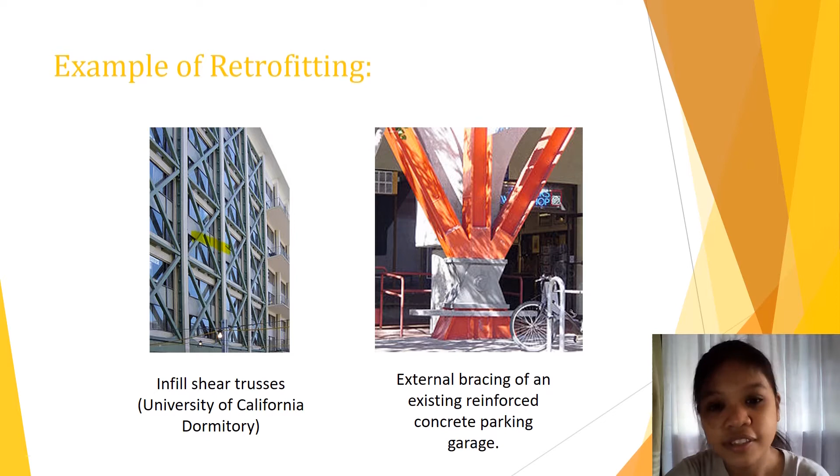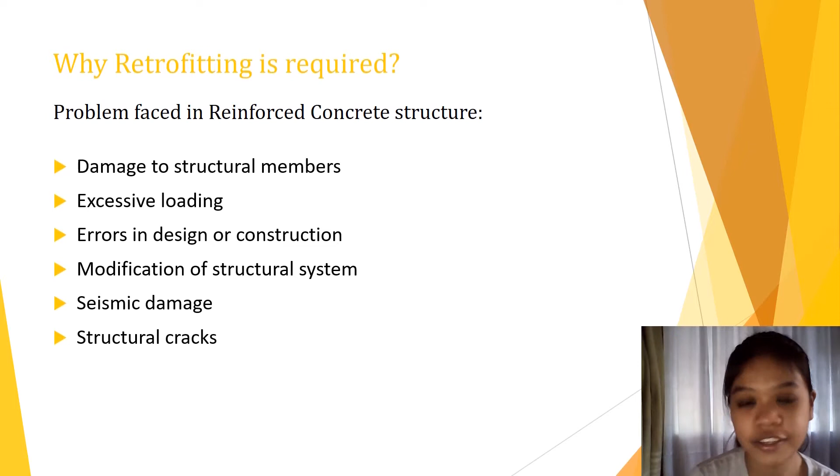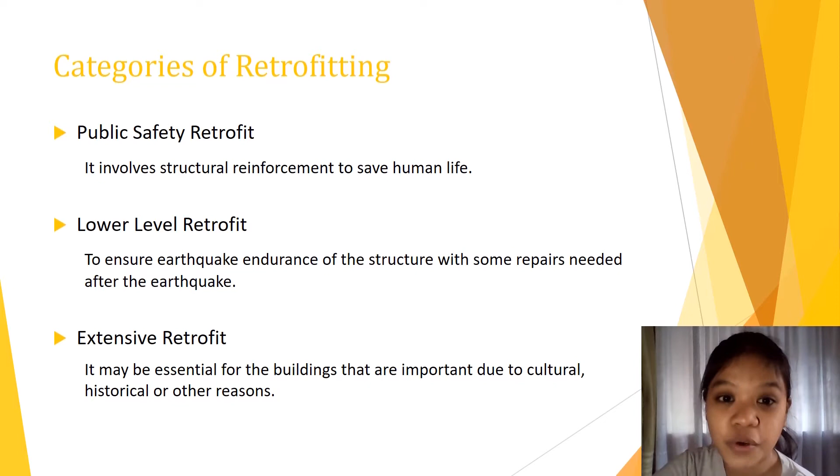Mostly, retrofit is performed on buildings that are extremely high with an unsafe earthquake vibration frequency. Presenting to you the retrofitting techniques that are used for the structures.

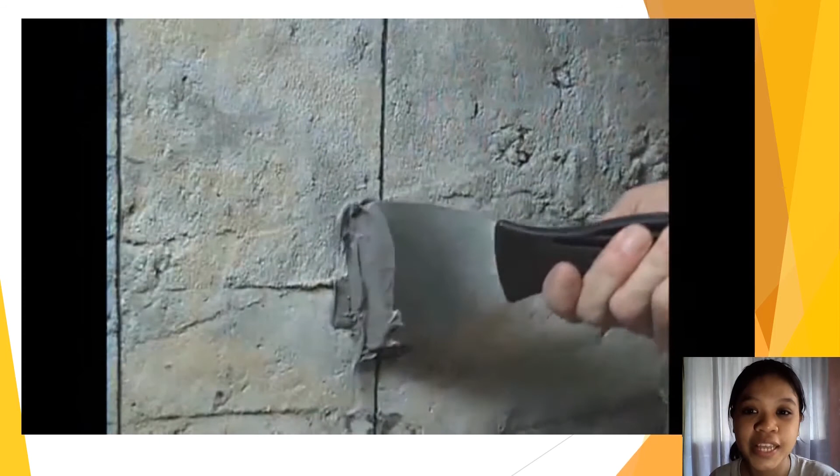So, here's the example of the grouting and micro-concreting. And to be able to understand the method more clearly, I will show you another video on this method. So, I'll be playing this video. The following is the process showing how to perform crack repairs utilizing structural injection techniques.

The first thing is to clean the crack using a wire brush. Then thoroughly clean the concrete surface around the cracks so that the cracks are not left with any debris. Blow out the crack with compressed air, and then seal the crack on the outside. This is referred to as capping the crack. Use two-component general purpose repair epoxy and apply it to the part where the crack is.

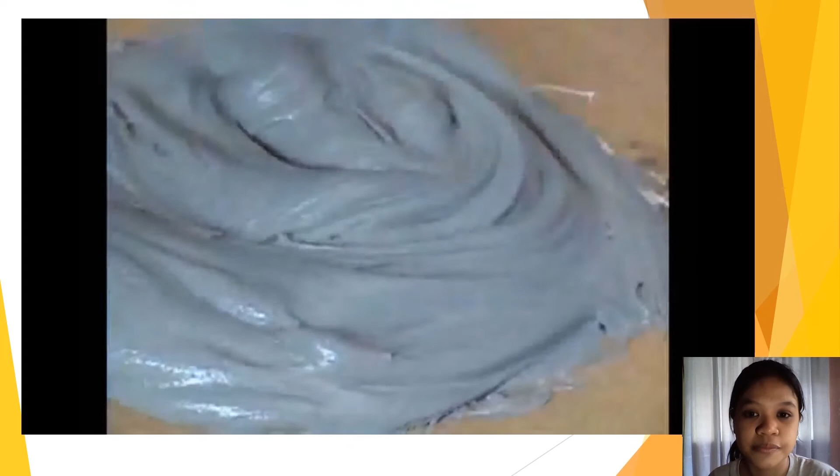And then, the epoxy should be applied 1 to 2 inches wide along the length of the crack.

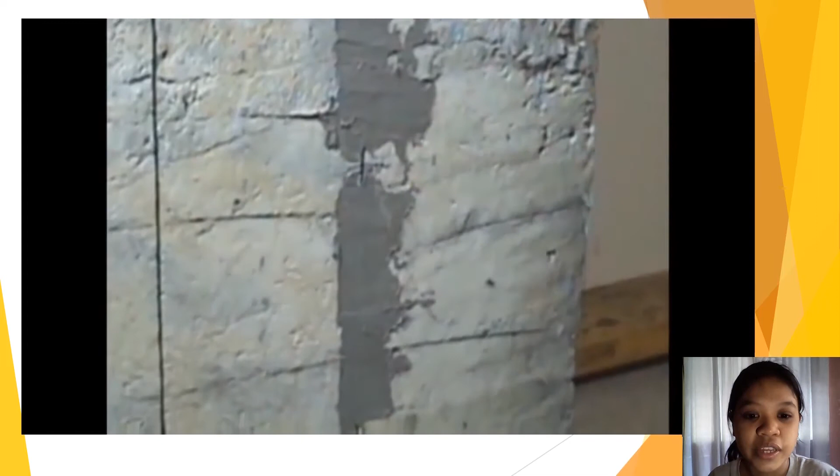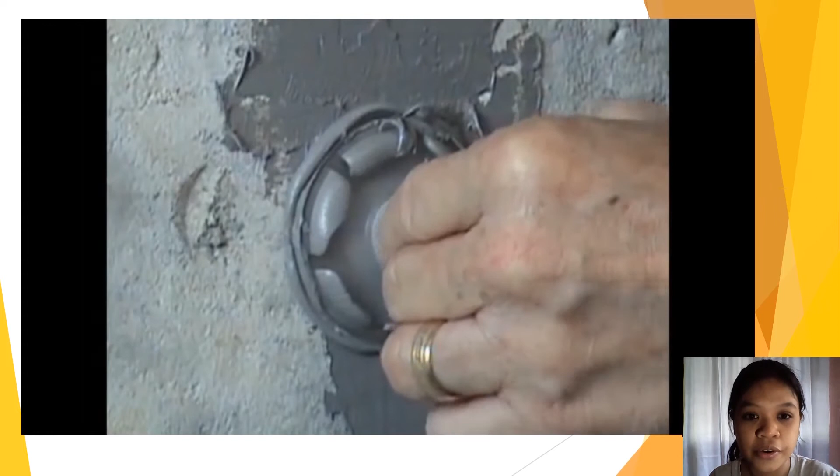Then, next is to fix the grouting nipples in the crack at a spacing of 6 to 8 inches.

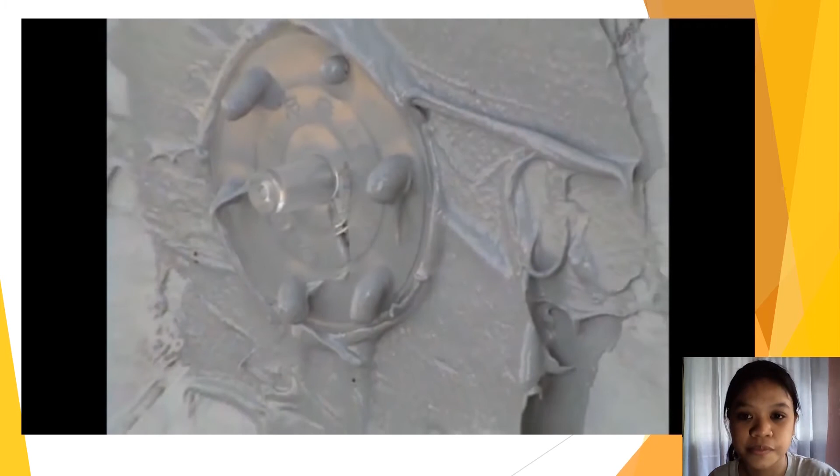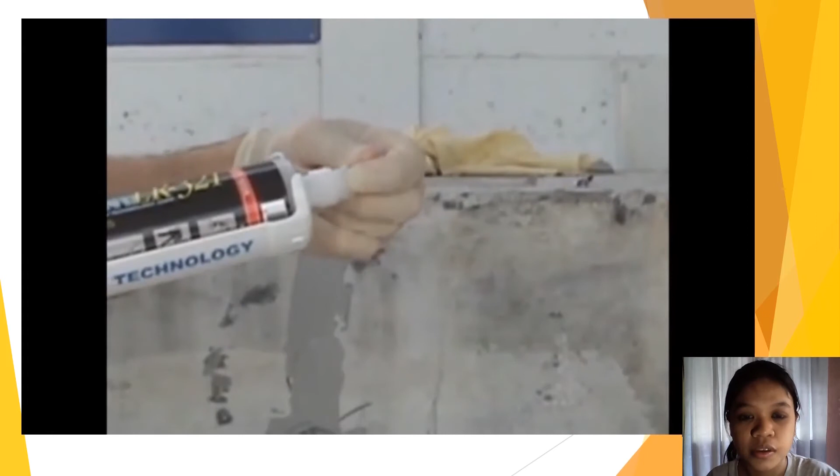And then, make sure that the epoxy is completely cured before starting the injection process. Inject water through the nipple so that the dust inside the crack is washed off and the concrete is saturated with water. After that, inject the grout till it comes out from the next nipple and then move to the next nipple. That is the first one.

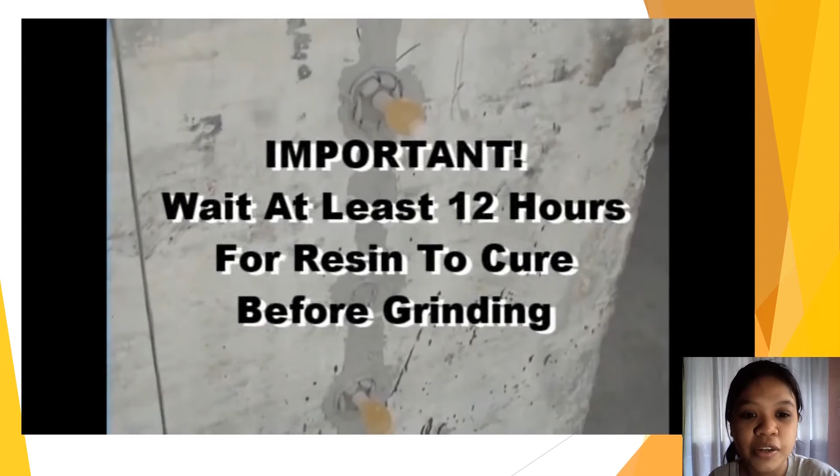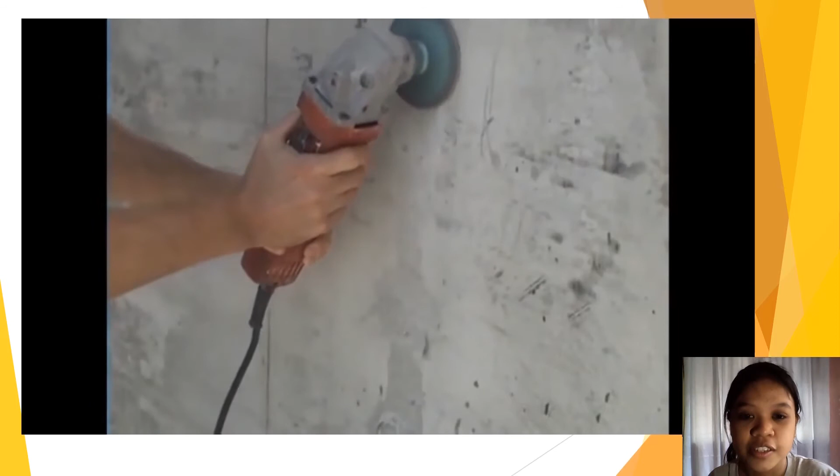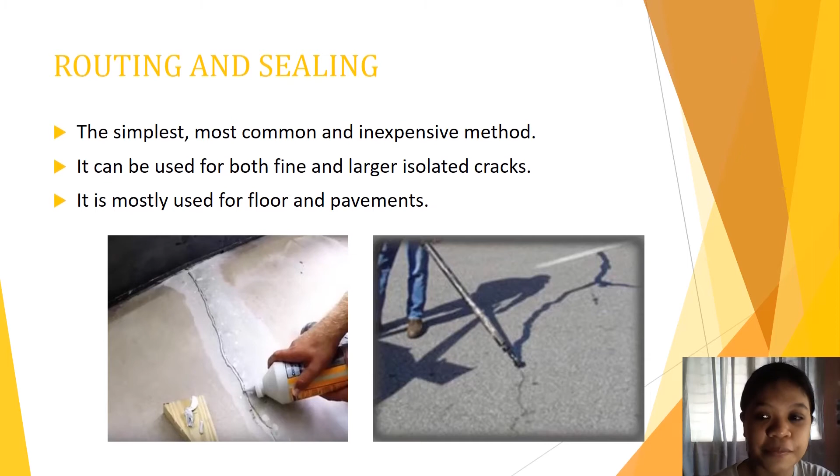The third method is routing and sealing. Routing and sealing is the simplest, most common, and inexpensive method. It can be used for both fine and larger isolated cracks. It is mostly used for floors and pavements. So, this is an example of routing and sealing on floors and pavements. Then, this is the typical section of how the routing and sealing method is done.

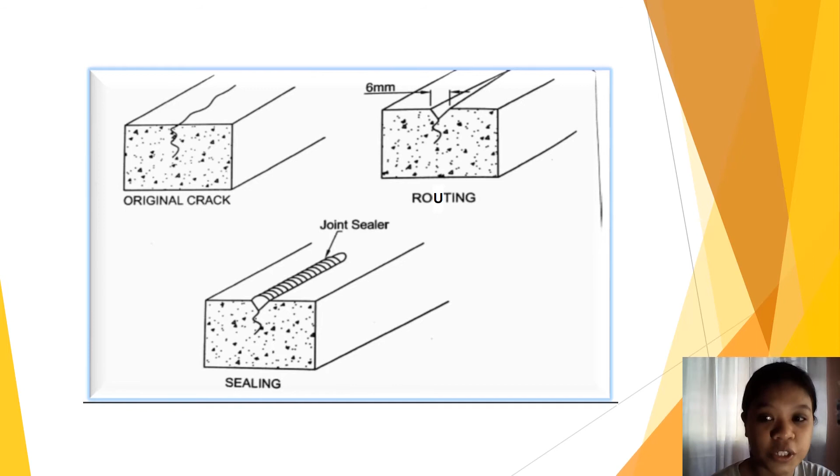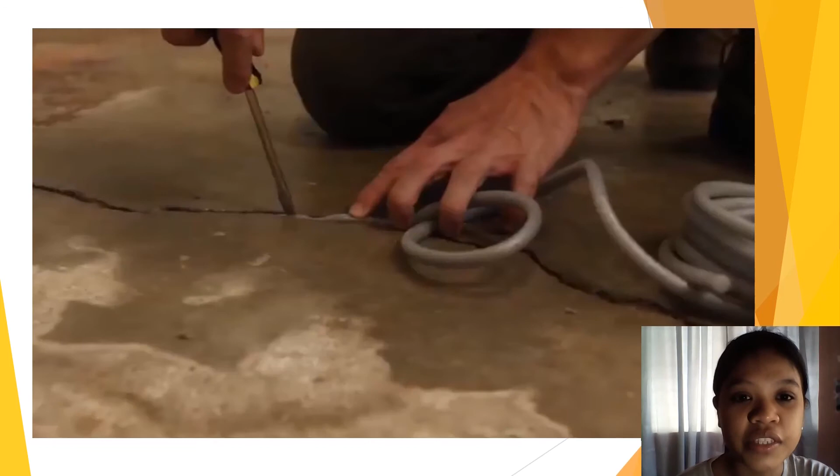This is an example of repairing the cracks on the floor slab. The first thing to do is to clean up the crack and any debris by loosening it up with a screwdriver or wire brush, then blow it out with an air compressor to remove the dust. Drills can also be used to easily widen the crack and clean the remaining dirt. Then, use backer rod to press down into the crack. Backer rod is a round foam which is available in different diameters depending on how wide the cracks are.

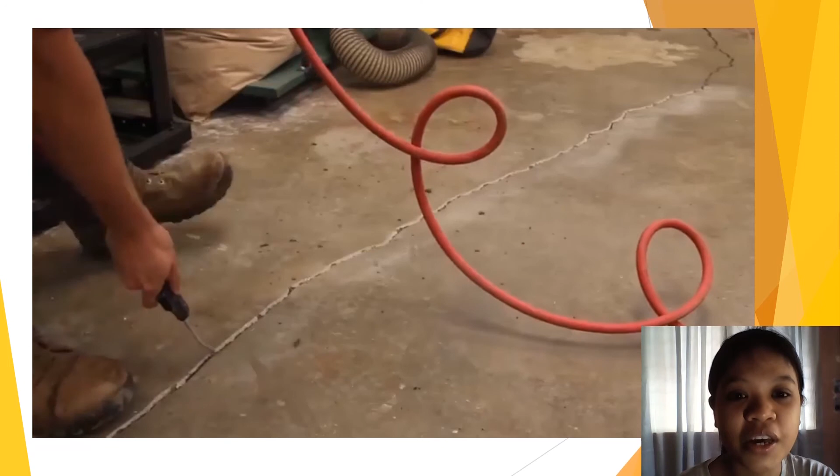The next method is stitching. Stitching may be used when tensile strength must be reestablished across major cracks, by grouting in U-shaped metal units with short legs called staples or stitching dogs, or bolting with steel strips on both sides of the crack. Stitching involves drilling holes on both sides of the crack. So, the following pictures are examples of stitching.

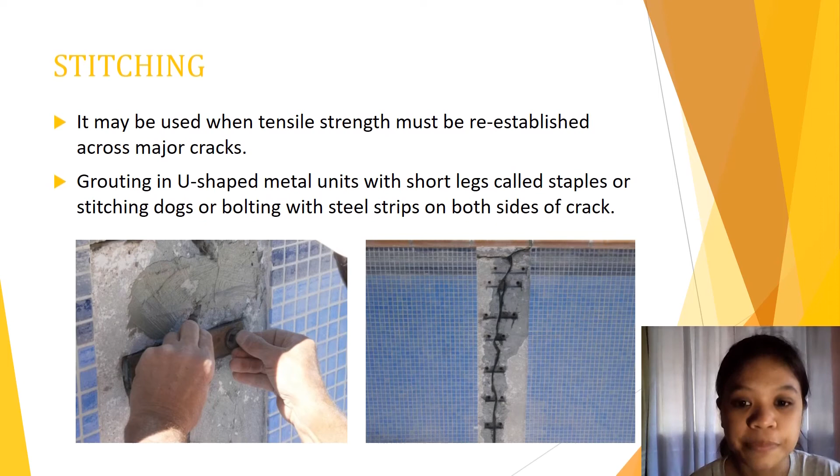Then, this is the typical section of stitching the crack of the concrete. The crack stitching is used for repairing cracks in any types of masonry. It can be stone, brick wall, or block wall. An example of crack stitching is shown in this video.

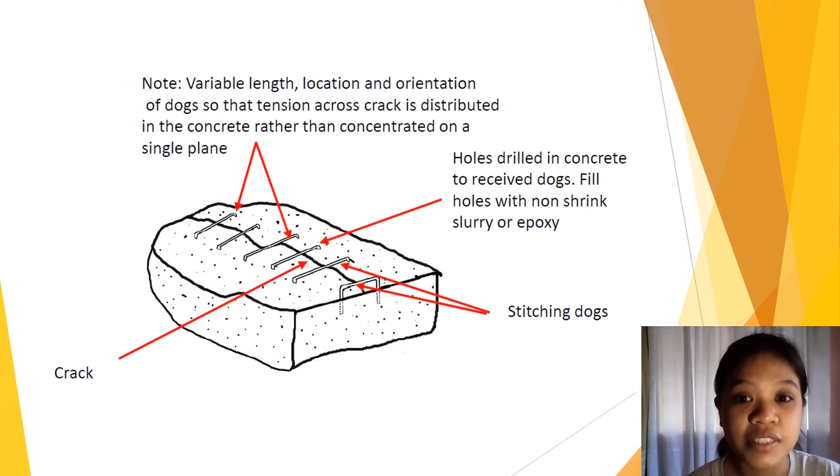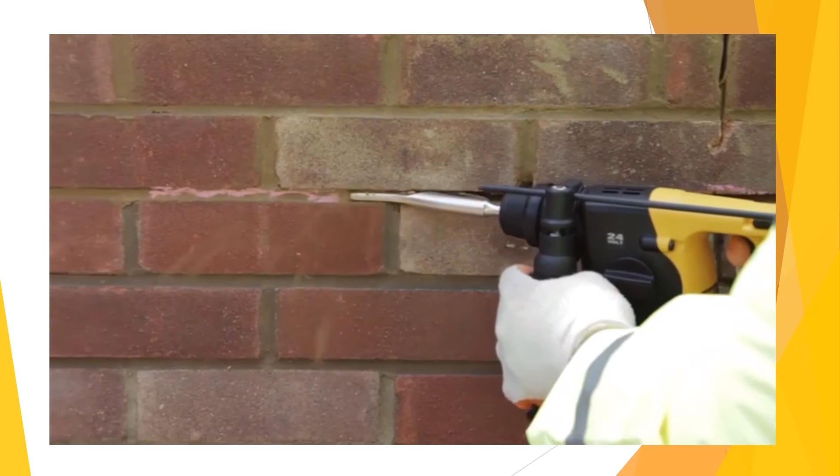Step 1. Rake out or cut slots into the horizontal mortar beds extending 500mm either side of the crack to the specified depth. Step 2. Clean out the slot and then flush thoroughly with water. Step 3. Using the provided mixing paddle and a power drill, thoroughly mix the Helibond grout.

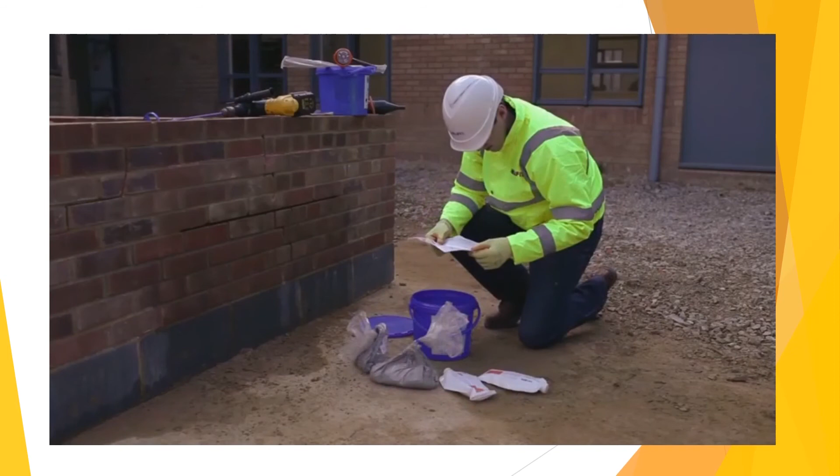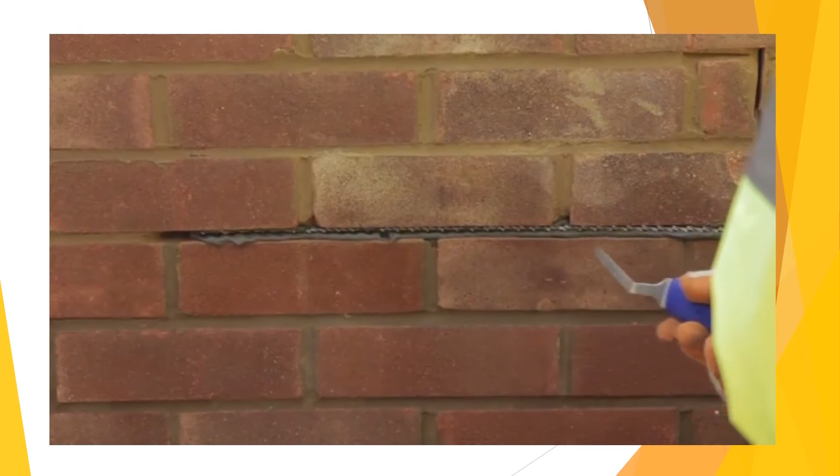Step 4. Using the crack stitch pointing gun, inject a bead of Helibond to the back of the slot. Step 5. Using the Helibar insertion tool, push the Helibars to the back of the slot, ensuring good coverage. Step 6. Inject a second bead of Helibond grout and then use the Helibar insertion tool to ensure complete coverage of the Helibars. Step 7. Repoint the mortar bed and make good.

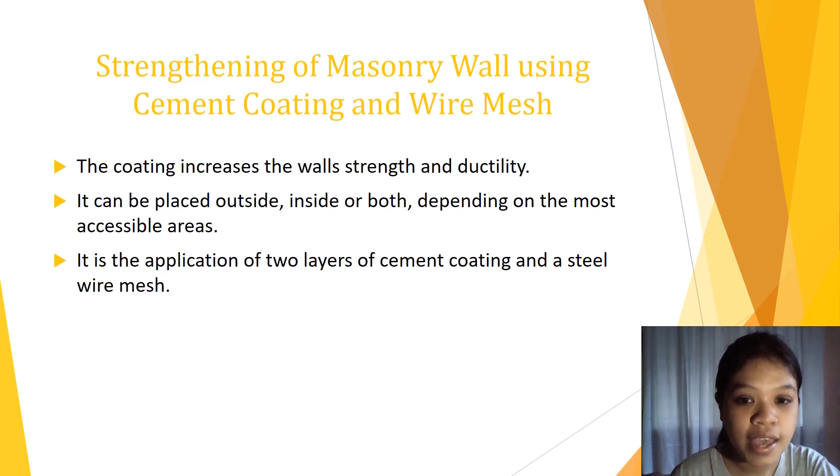Then, the last method is the strengthening of masonry wall using cement coating and wire mesh. The coating increases the wall's strength and ductility. It can be placed outside, inside, or both, depending on the most accessible areas. It is the application of 2 layers of cement coating and a steel wire mesh. So this is an example of the application of cement coating and wire mesh.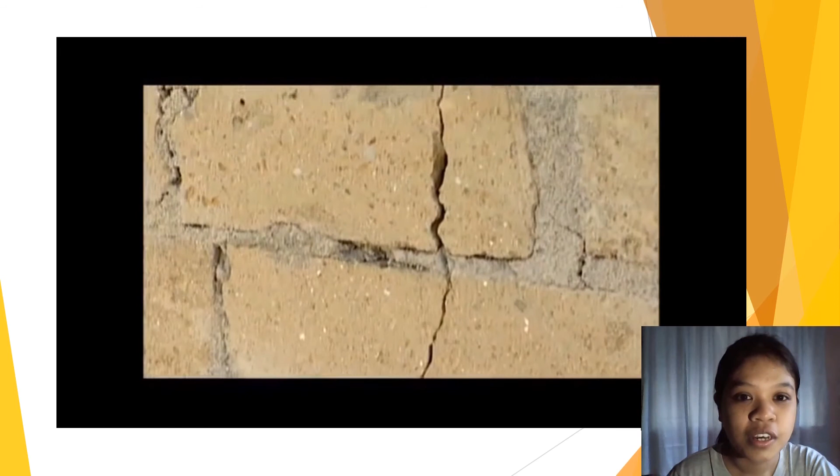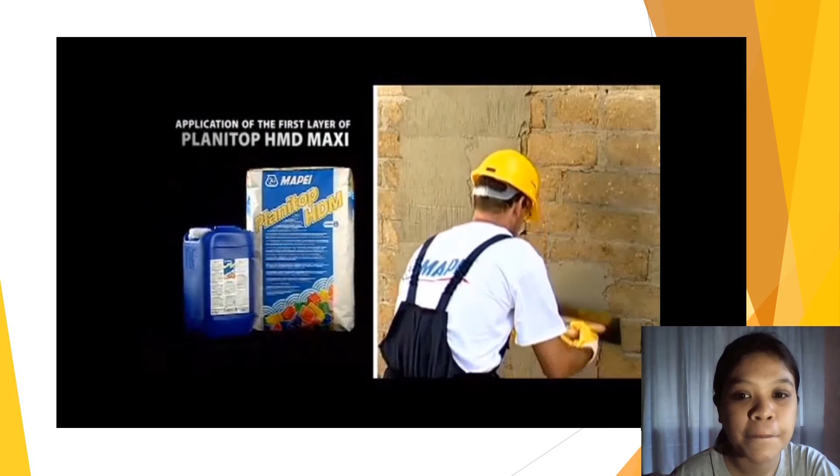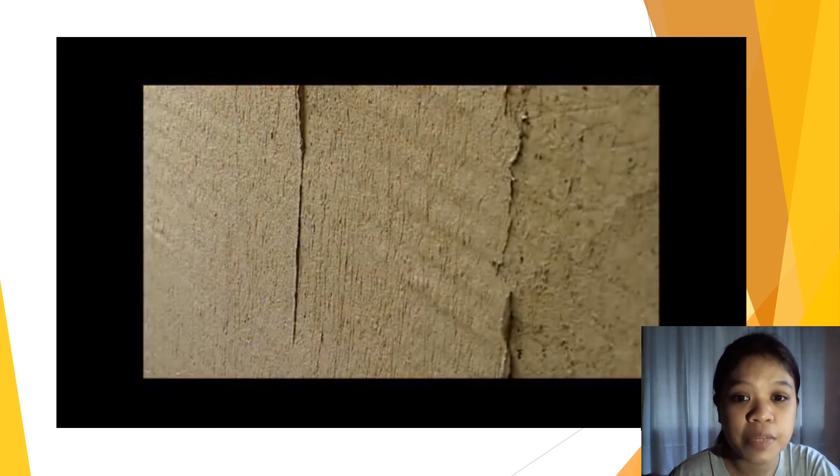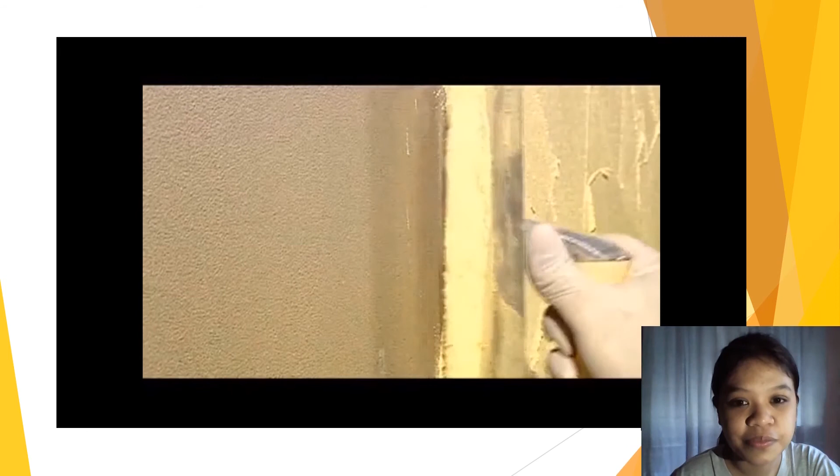The first step is to pre-wet the surface of the wall. Next is the application of the first layer of cement. Then, apply the wire mesh. The third step is the application of the second layer of cement. Then, apply the primer to the wall. And last, the wall can be finally painted.

So now that I finally finished discussing the introduction of retrofitting and the different methods for retrofitting, right now I'll be doing the evaluation on our house.